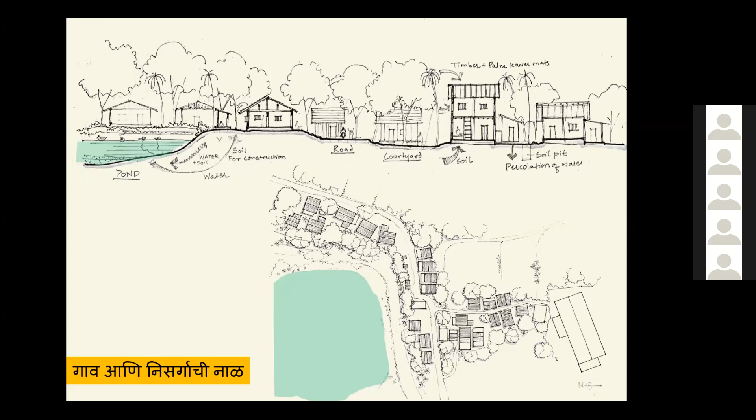In itself it has a point of view which we as architects should be learning from. So I don't see tribals as somebody who's backward or poor. We see them as somebody who's way more progressive than us and way more thoughtful than anyone of us right now.

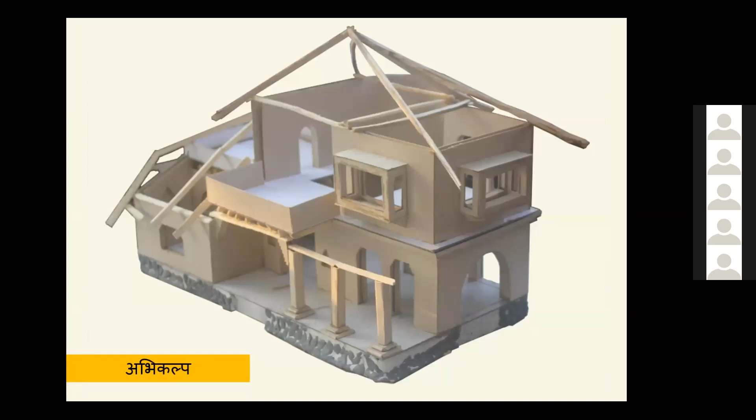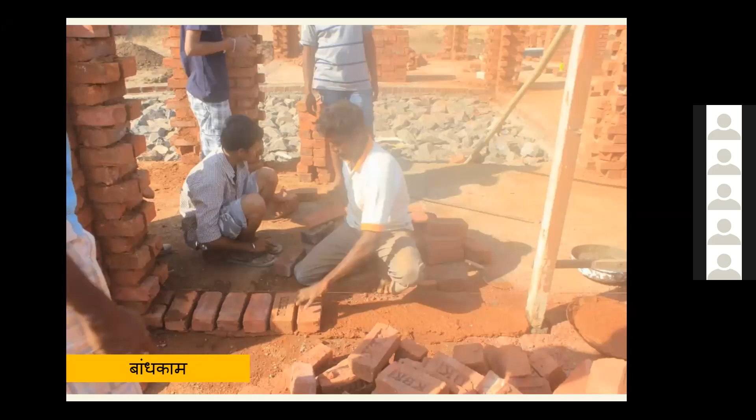For this project, our site was getting developed - our house was getting built simultaneously with the model. We realized in the initial recce visits that drawings are not going to work for this project, so we started building a model wherein the Mistris or masons used to look at the model and build accordingly. That's the model, which is like an in-process model that never got over, by the way. That's a very important part that we as architects miss today. In our 5-year journey, it's extremely crucial for all of us to get down on the ground and work with the people building the structure you've designed. It's important for us to be there with them to learn things first before teaching them what needs to be done. So this was the progress we made initially.

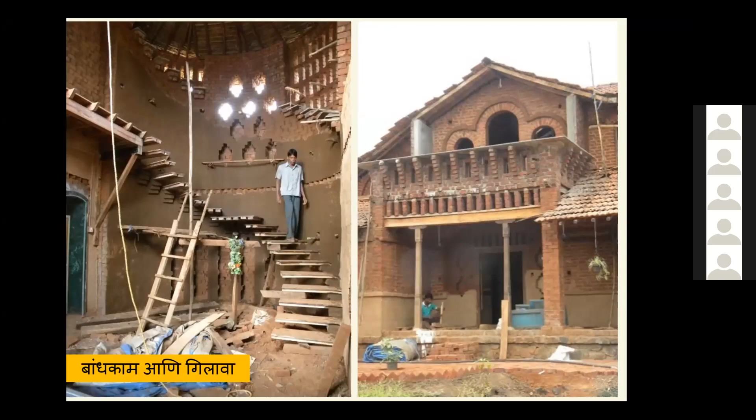That's the interior. And that's the completed house.

The brick jallis that you see on top throughout the project help in cooling the air, and the cool air comes inside while the hot air at the above level goes out from there. Also, the direction in which these jallis were placed was such that the sun doesn't come inside. So basically the heat and light get obstructed while you get the breeze. You need to design all these things very critically.

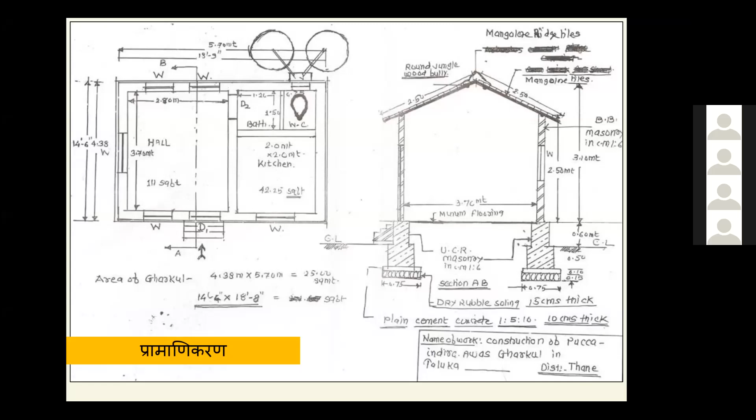What is not nice is if I was one of those 200 people, I would have a different set of requirements, and I wouldn't want my house to not have an identity. I do not want my house to look just the same as my neighbor's. Just because we are poor does not mean we have to fit our needs inside a box which is thoughtlessly designed. So this was a uniformity that was being designed by the engineers and given to the people.

So this was the house. This is what we came across in our studies across Maharashtra state, of people who stayed in the rural context. These people are used to staying in houses which are like 2,000 square feet big, 3,000 square feet big. Just to give you an understanding, a Bombay 2BHK is 700 square feet big. So it's 3 times the house that we stay in Bombay is what these people used to stay in, in the villages.

And what we are giving them against those houses is, you are staying in a kacha house, do not stay in that, we will give you a cement pakka house, which is only 300 square feet. What happened at the end of these projects was the people used to convert these into toilets or lock their storage inside it and never go and stay in these houses because they were not livable. What I'm talking about is the Pradhan Mantri Awas Yojana project in the rural context. These are a few examples which were made by the government for the rural context, saying this is a house where you have to go and stay because it is made in cement, it's a pakka house.

So for this project, what we did was we told the government, look, this is not how it should be, because these people are living in a much better condition than what you are providing them. And the kind of promotion that we are doing for cement and asbestos sheets, for example, is not environmentally friendly. So they said, look, we have to cater to a very large target audience, and you cannot be so specific that we sit and design a house with each individual person. That cannot happen, neither do we have the funds for that.

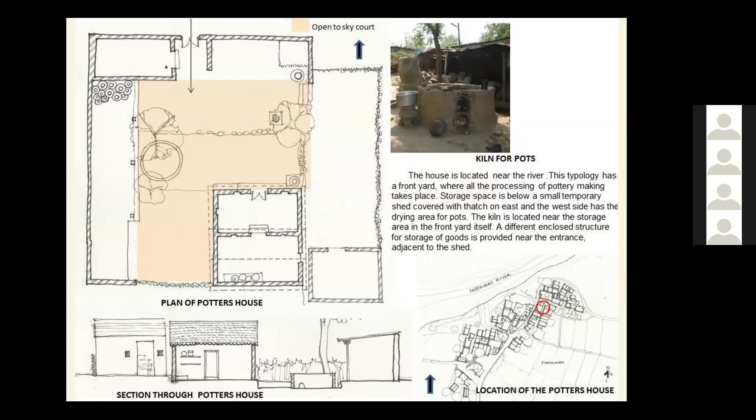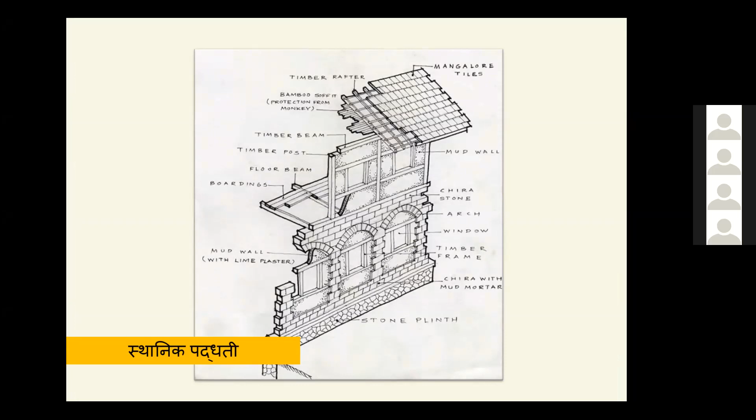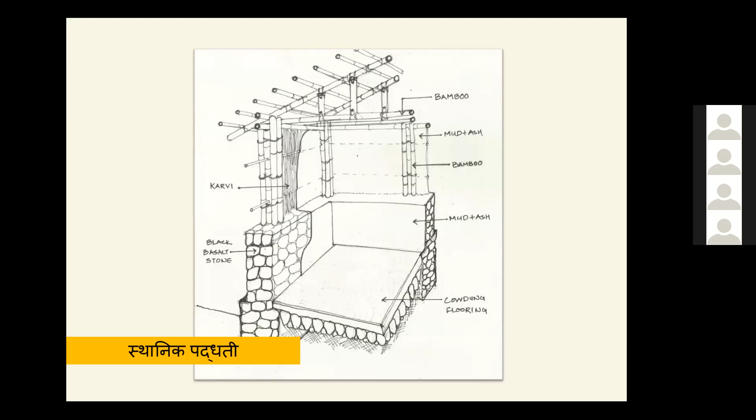And we also studied how these people have something called incremental planning. So they build - it starts with just a very small foundation. They make a small core house, then they increase the house, take it a level up. The next stage is where they start extending verandas on each side. They start roofing it slowly, convert it into verandas, then convert it into rooms. And that is how the whole house gets built over a span of 10 to 12 years.

Now this is a timeline which is even absorbable for the nature or the natural resources that they consume to make the house. It is very important that if you are taking 10 trees today to build your house, versus taking 1 tree every year to build your house, it impacts a lot on the ecology.

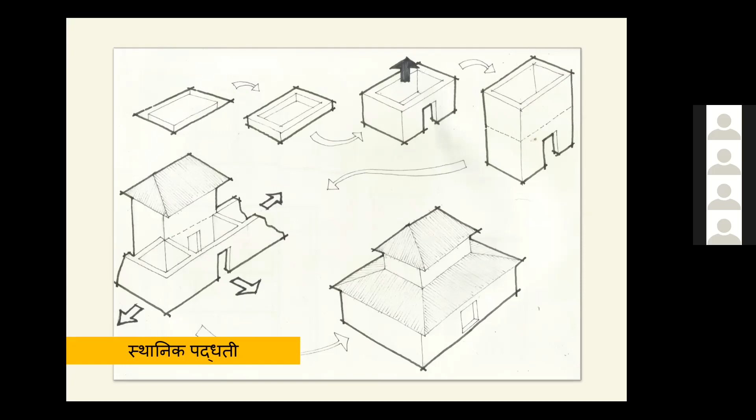And the next step for us was, after the documentation, we had to train the junior engineers about our study, about how we can improve the whole Yojana, where they need not just make dabbas and give it to everyone. They can do so much better.

So the government gave us this exercise to execute five projects the way we wanted. We had designed a process that needs to be followed. It's not the product that needs to be sold, it is the process which needs to be followed, whether it is us or with anybody else.

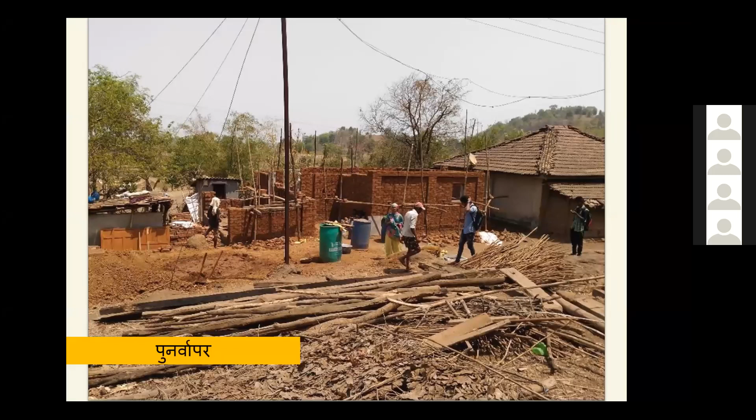So this is where we sat with the local Mistri and the client, and we made different options of the models where we discussed with them. Is this kind of space enough for you? Is this something that needs to be manipulated? And then after they approved it, we started executing the house with them.

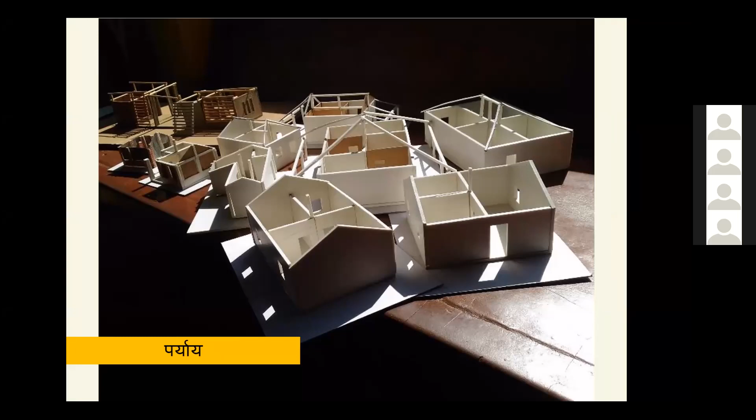So these were the different models that we had made for them, and each model had a different monetary aspect associated with it. So we would tell them, if this is the foundation you choose to build, then this would be the costing. If this is the kind of walls you choose to build, this would be the costing. So they had the flexibility to choose what kind of foundation, walls, or windows they wanted. And this is how it progressed.

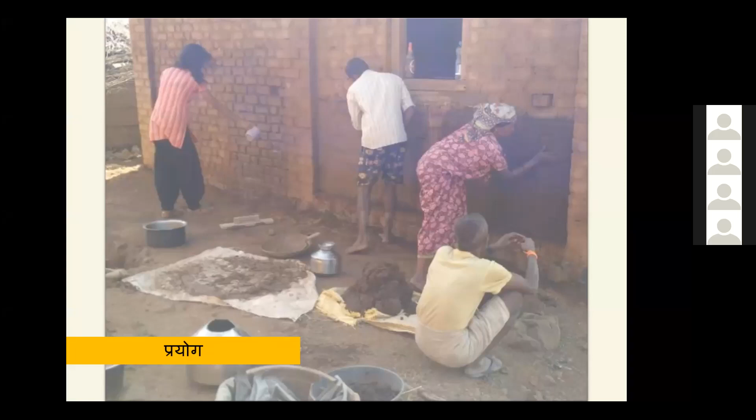Once those structures were built, we started trials of plaster. They were used to making mud mortared brick houses, but the plaster has to be cement. Why? Because they do not trust the mud enough, or their skill set enough. So in order to protect the houses, they thought that cement plaster was the only option. So we tried four different types of plasters and let them choose if they wanted. Out of five, four chose a third sample of mud plaster, and then they painted it according to their wills and wishes.

What was interesting in this process was there was an additional step wherein we documented all the waste materials or old materials which they already had. We designed things according to what they had. Some people had bricks, some did not; some had wood, some did not; some had Bangalore tiles, some did not. So it was a process wherein a lot of permutation and combination had to happen because the needs and requirements of everyone were so different.

And we allowed them to have these beautiful colors which they love.

So this was the Pradhan Mantri project, wherein the lesson for us was how architects are not some people sitting in offices high up there to give orders to the contractors on site. They are more like facilitators, where you need to understand the needs of your client, the needs of the government, and be a mediator. You cannot just sit and design and say, this is only my scope of work. Architects have the power to go much beyond and do so much for the society. So this is the project that taught us that.

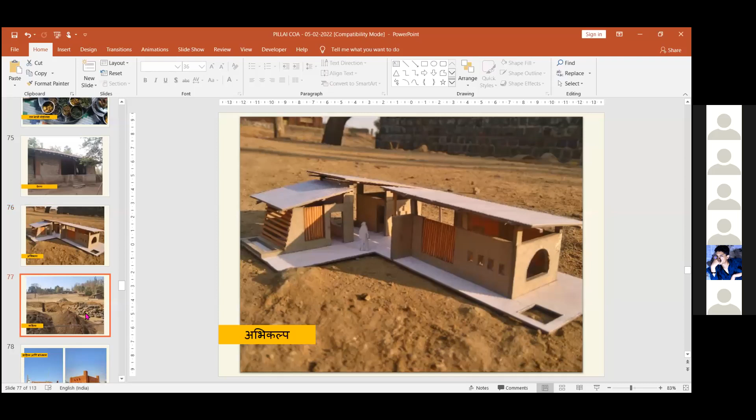And this is what we proposed. We knew that drawings are again not going to work, so we directly make models for all our community projects, with perspective in mind, wherein the mistris should be able to understand the model. The people who were going to build this were the village people, so it needs to be simple enough as a structure that they should be able to execute it without much problems or complexities. All the materials we sought were within a 2-kilometer radius, so these people could gather it easily without much financial burden on them. So all these materials you see were collected from here and there nearby.

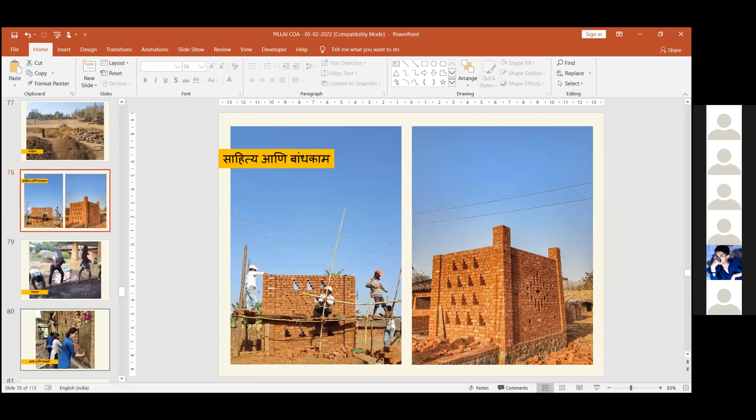And this is just the simple basic formwork we needed to construct this structure. It was just small bamboos which grew in their backyard, or some very thin trees which were used as scaffolding. And since the floor was mud, all the village people came together to make the mud floor.

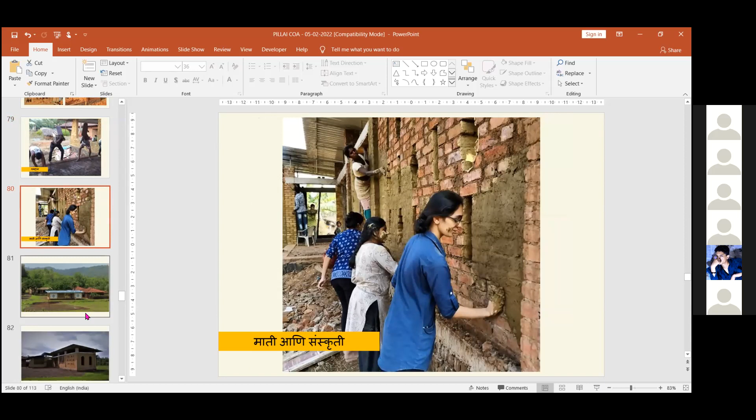We invited a lot of architectural students who volunteered to happily come here and have a dialogue with this particular village. What they learned from this was more of an architectural skill, the softer side of architecture, while for the village people it was more like pride in their construction, with people from the city coming to see or learn what they were doing. So it was a two-way benefit that we achieved.

And this is what the structure looks like from one side. The reason we did not go for a sloping roof was because the village wanted to install solar panels. It's not that it's not possible with Mangalore tiles, it's just that it gets a bit complex and leads to leakages sometimes if not executed well.

Considering the skill set that we had, we thought it was not interesting to go complex. It was more needed to go for something which is simpler, which people can execute well. And that's how it ends up today.

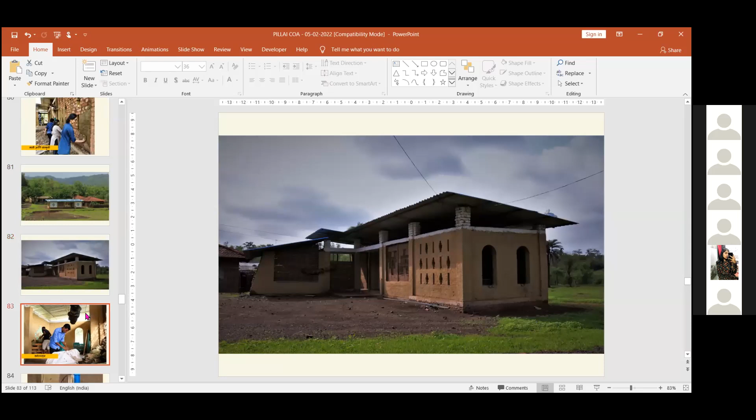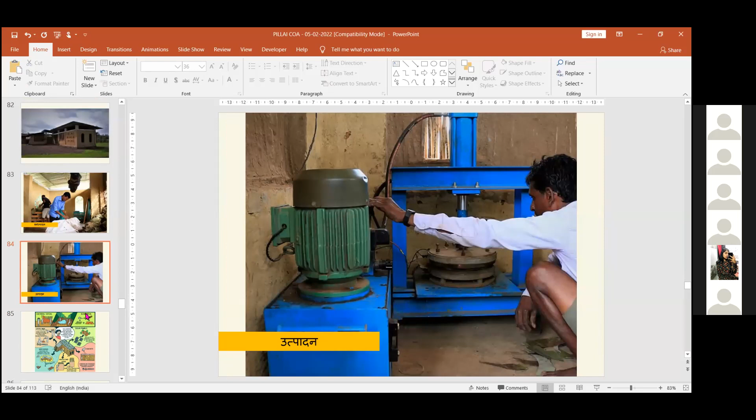So the structure basically gave them the flexibility to put things wherever they wished was best for that particular activity. It was a composite of open, semi-open, closed kind of spaces, so they could use it the way they wanted it to be.

So this is a poster made by Leewardists for this particular project, wherein we touched upon these aspects of social and cultural, ecological, economical considerations.

Solar panels were used. The electricity generated by the solar panels is used by the center, but the surplus, which is the leftover, is utilized by the village as well. We used local mud, local materials within a 2 kilometer radius, and their technology of bricks with mud mortar and wattle and daub.

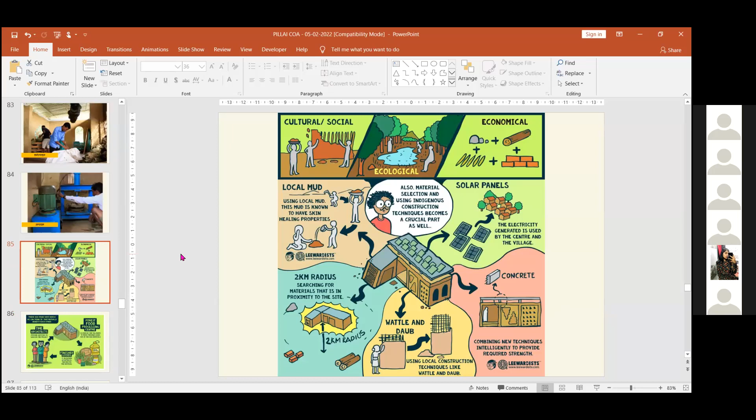The fees for this project was very interestingly taken. We had told them you can pay us in cash or in kind. And what we received was part cash and part of the fees was in kind. This was very interesting - most of our community projects have a very interesting fee structure. So the fifth project is the tribal farmers' house.

This is again a residence, so to say, but it was made basically for the patil of the village. The patil is the head of the village. And this fellow's house looked like a very small shanty.

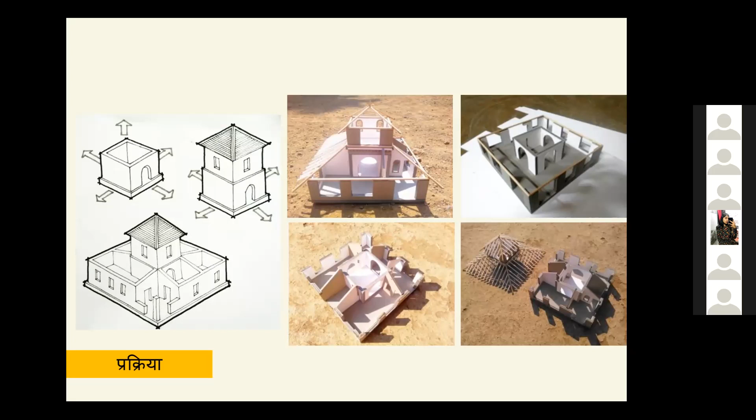Now, these people had a very, very poor skill set, and hence we did not want anything complex to take up. Also, this house was planned in such a way that even if they do not have the funds to complete everything in one go, it should be incremental in nature, something that we had learned from them only. So this is how we had planned the house to be, but we ended up saving a lot of money so that we could construct the entire house in one go.

And everything, right from the walls to the wooden members to the joineries, everything was worked in the model. And this is what was given to the masons on site. This is the progress of the house. That's when it went G+1. This is how it was just before the finishing. And that was the completed structure.

So this is another project wherein we worked for an individual client, but the client's entire family was working as laborers, as skilled masons. We had the entire village give up their skill set towards making of this house. So it was more like a family or a community project rather than an individual house project. This is something that we find missing in places that we work in the urban context today.

So being very context specific, we had to see to it that you be a part of the community that you're working with. In the current project, I think for you, it is again a community project. And due to the pandemic, I do not know how flexible your journeys or your visits would be to this particular site which is selected for you in Panvel. But I would still want you to understand a different kind of approach wherein you can be more involved in the entire process rather than just being an outsider coming to design for a few weeks and just finishing it there. There's a difference, and it could be much more enriching as an experience or a process for you if you try out this different kind of way of working also.

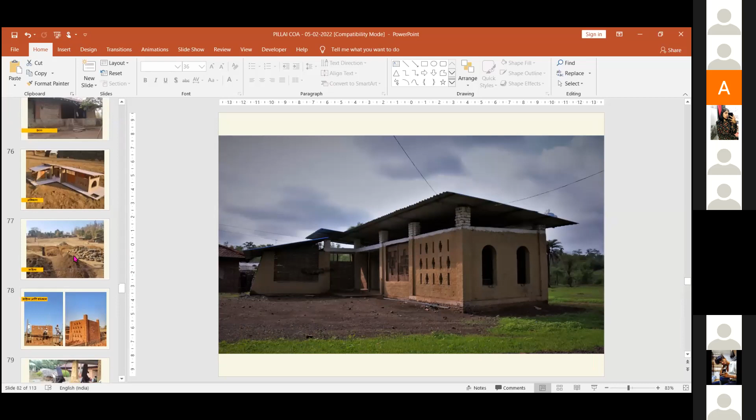Then if I talk of this project, I would say it costed us 0 rupees because thanks to all the students who volunteered to come here to learn wattle and daub or cob, we got to simultaneously build it with their help. So this was a mutual benefit project again, it costed us nothing.

If I talk about this project, it is again some 450 to 600 rupees per square feet range, because here too the people built their own houses and it was in such a context where the labor was cheap. Most of the materials was reused even in this situation.

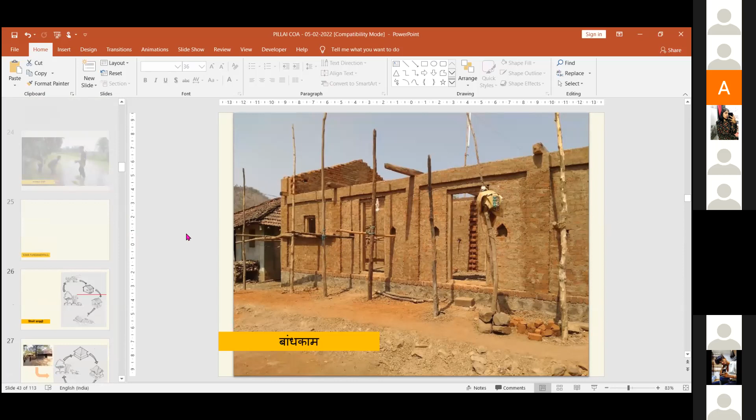If I talk of this project, this is somewhere in the range of 2,200 rupees per square feet. This was back in 2014. So you would say that this is almost like twice the RCC, but it also has a lot of detailing and a different design sense to it.

If you talk about this project, it is again 2,500 rupees per square feet. This one is 3,200 rupees per square feet. So it's not that there is a fixed range in which such constructions happen. It depends on the kind of detailing or the processing of natural materials that you have to do, and the kind of client you get. If you are with a client who is okay with snakes crawling inside the house and doesn't need any mosquito proofing, all the details come down, the cost comes down. So it depends on the different people that you're building for.

Definitely. Thank you so much. Thank you.

Anybody else wants to ask anything? Please go ahead. Hello, ma'am.

Hello, hi. So I wanted to ask, at times when we go for context-specific design, students get stuck with the idea of designing spaces according to their own thoughts of how the design should look, rather than thinking about the space which needs to speak for the people using it. So how do you make sure your orientation to design is people-specific, rather than just favoring your own thought of what design should be like?